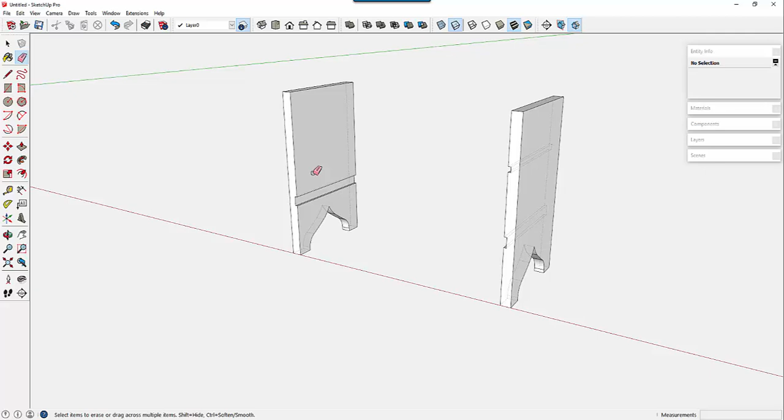Following from the first video, creating the end components, in this video I'll make the bottom, front, and back components.

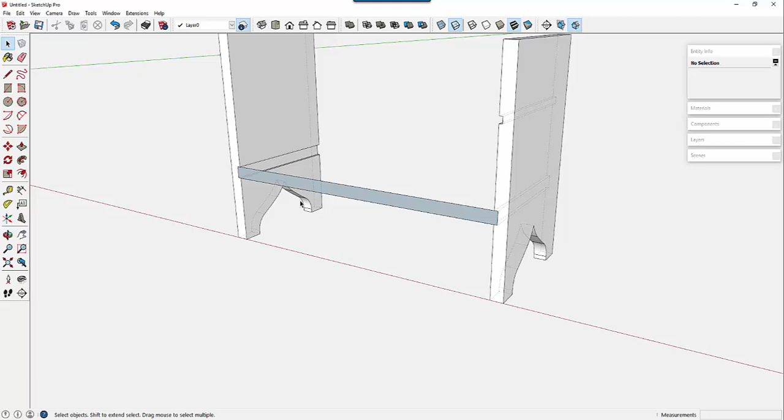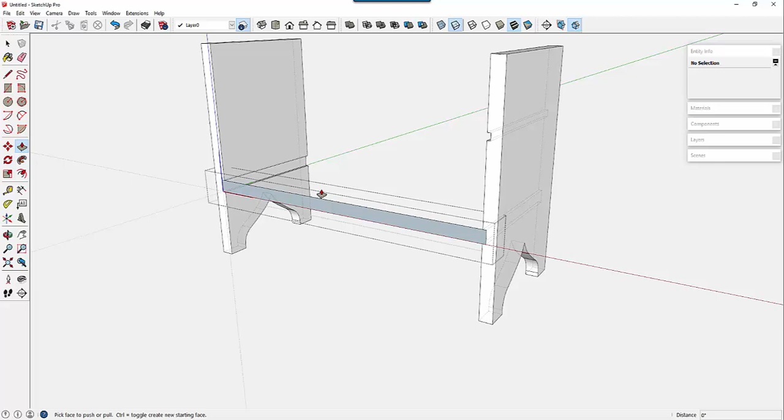Use the rectangle tool to create an edge face for the bottom. Double-click on the rectangle, then right-click and choose Make Component from the menu. Name the component Bottom. Edit the bottom component and use the push-pull tool to give it a width across the full length of the

groove in the ends. Click on the back edge of the end and this completes making the bottom component. Now for the front.

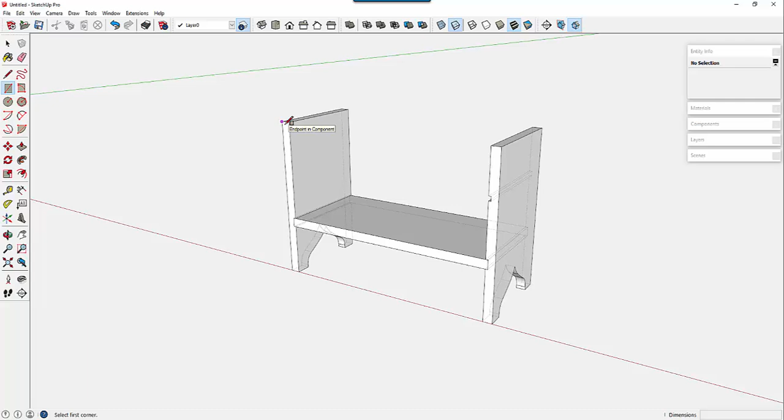Again, choose the rectangle tool to outline the face of the front. Double-click, and right-click on the selection, then pick Make Component from the menu. Call it Front/Back.

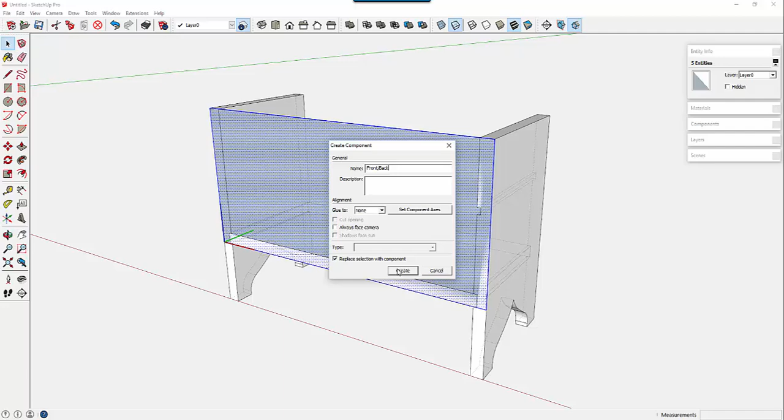Then, with the push-pull tool, pull out a thickness of 5/16 inches.

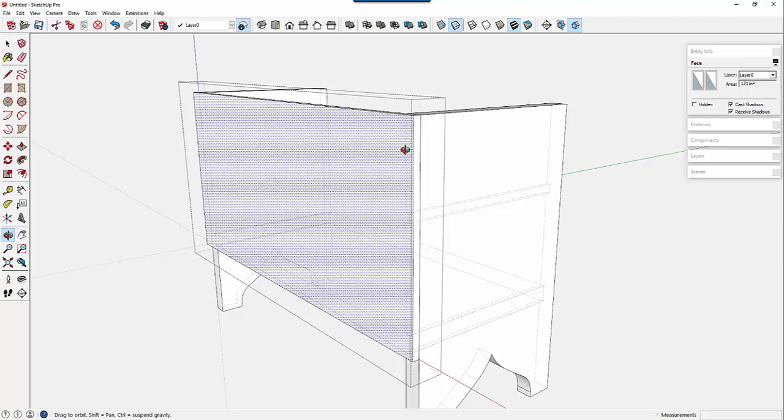The front and the back components are 1/2 inch thick, with a 3/16 inch deep rabbet around the edges for housing the end and bottom components. To create the rabbet, orbit around for a rear view of the chest.

Edit the front component and draw lines in the intersecting corners of the bottom and the ends.

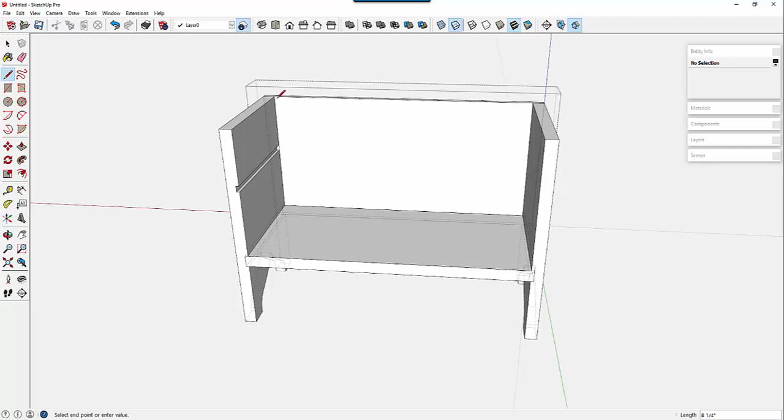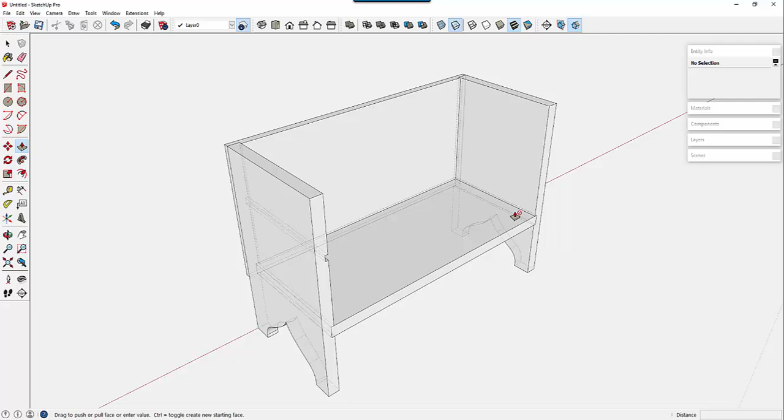Then with the push-pull tool, pull out another 3/16 inch thickness to the inside face of the front. This makes the front actually a 1/2 inch thick, but with a 3/16 inch deep rabbet around the inside face

of the front. You can verify the surrounding rabbets by making a copy of the front and moving it away from the assembly.

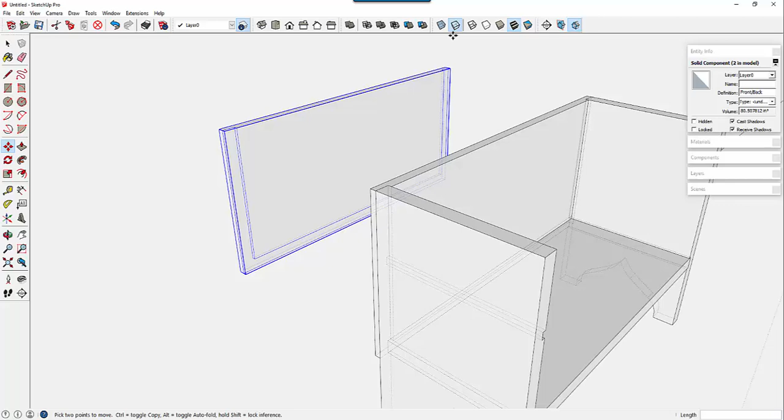Here you can see the successful making of the surrounding rabbet. Now that we're finished with the inspection, we can delete this copy.

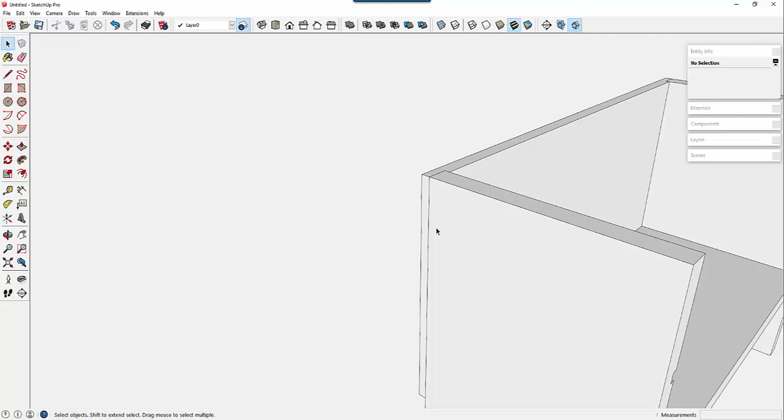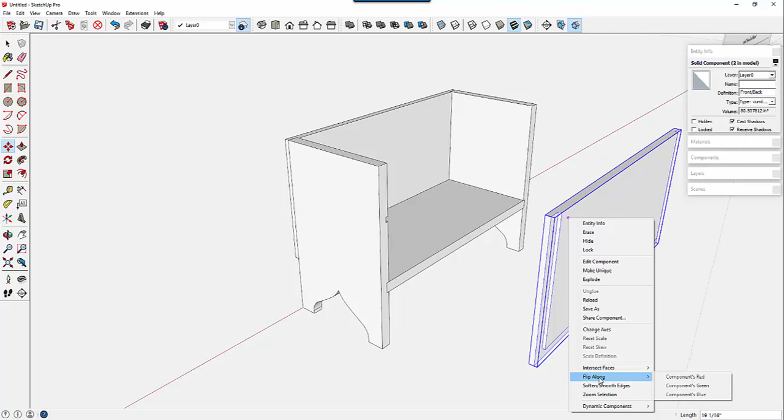Make a copy of the front component and move it to the rear of the assembly. Right-click on the copy and choose Flip Along Components Green to orient into the back of the assembly.

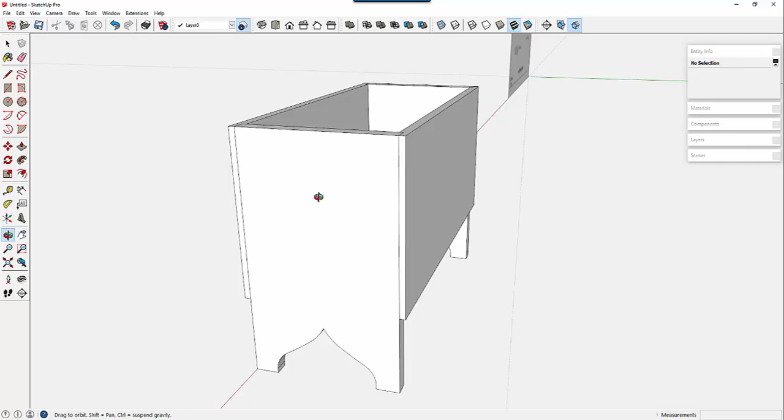Currently, a common component definition is being used for both the front and the back. Eventually, there will need to be independent definitions for the front and back. The front will require unique cuts for the front lock, and the back will have recesses for hinges. Delaying the separation is efficient since there is much commonality in the grooves and rabbets.